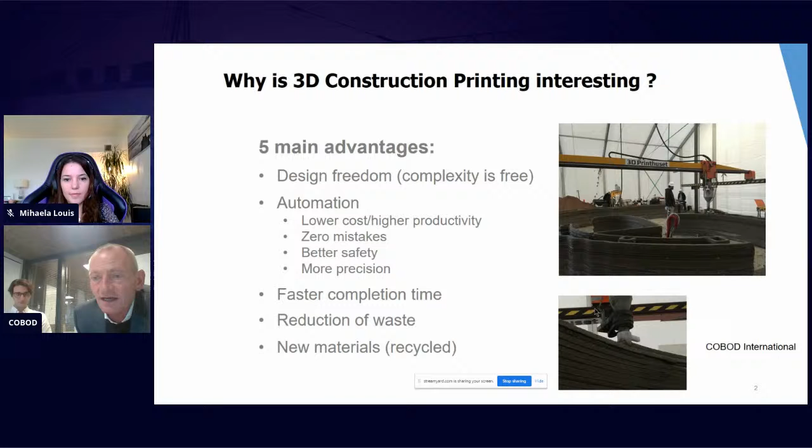Then, of course, from a CO2 point of view, it's also interesting that when you build this way, building the whole thing up from the ground, you don't use standard elements that you cut away to fit in size — you get an automatic reduction in waste. Finally, because this is a new technology, there's a possibility to apply new materials. Why not start using much more recycled materials as part of the building industry? Approximately 40% of all waste in the world is generated by construction and demolition activity. A lot of this waste could actually be recycled into new buildings, so we are definitely for doing that.

When you're not so clever, you have to ask other people. So here's what Deloitte, one of the big consulting companies, is saying about this technology. They're saying it's faster, 50 to 70% reduction in construction time. It's cheaper, 50 to 80% lower labor cost, less waste, and lower financing cost. And it's better because you can customize it, make intricate designs, design freedom, and so on.

Now, do we at COBOD believe this is the truth today? The answer is no, we don't. This is what we are hoping to achieve, but we are not there yet. We are showing that, yes, potentially we can get there, maybe especially for faster and better, and for cheaper. We are cheaper, but not as much as indicated here. That will take longer time to realize.

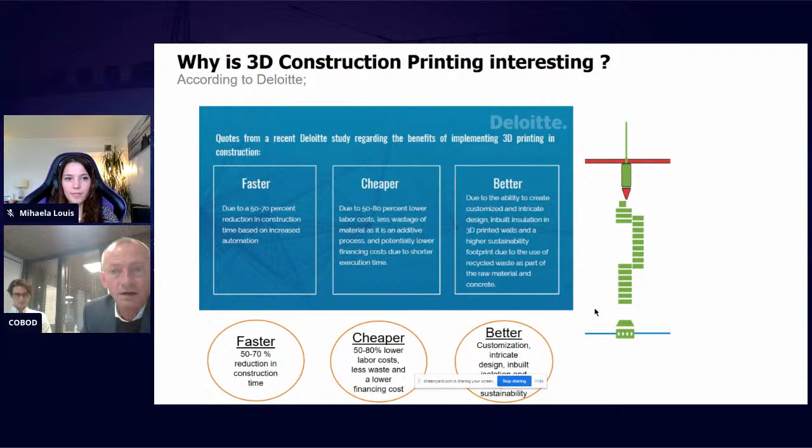It's important to understand that this is a technology that is really developing, and we need all the best resources thrown in to develop the technology and the processes around it as much as possible, which is one of the things that makes it very interesting for us to talk to you young architectural students, because you can help change the world.

This gap with Deloitte's potential has a lot to do with how it was when you first learned to ride a bike. The first time your parents tried to teach you, you'd probably be falling more than riding. That was the same for us. When we printed Europe's first 3D printed building, it took 2 months. The second time you rode a bike, you had a better idea, still insecure, falling less but riding more. Same thing here.

We made a copy print of that same building one more time, 2 years after, and improved the speed from 2 months to just 28 hours. By the fifth time riding a bike, you were mainly riding and not falling much, things going better. In our terms, that equates to being able to do the BOD building, a 50 square meter building, in around 8 to 10 hours.

By the 10th time, you were riding fast. Translated to our business, that would mean that in the future, we could see doing a BOD building of 50 square meters in just 4 or 5 hours.

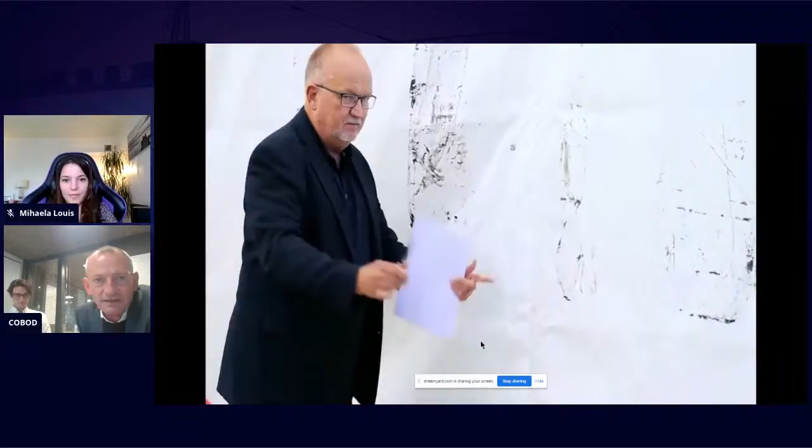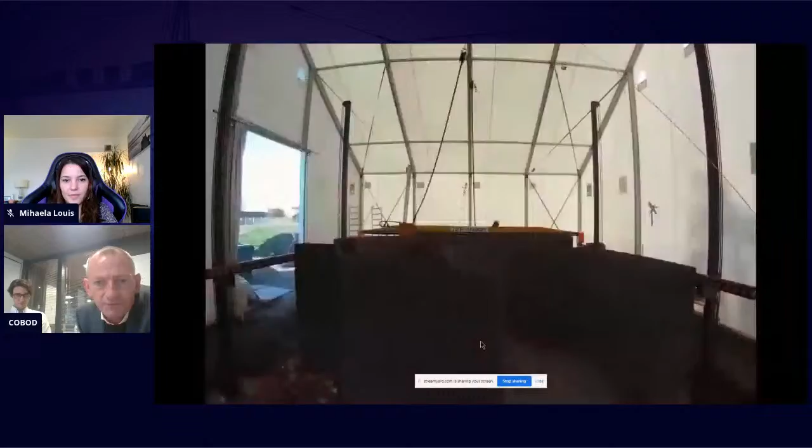If you look in a little more detail, we can show you the video of how the printing of the first building looked like, back in 2017. Typically for us, we did it in full publicity, with live television cameras rolling while we were printing. You see the building coming up here. At that point, we were called 3D Printhuset, and now we are called COBOD. Here you see the final building, still standing — it's a small office hotel.

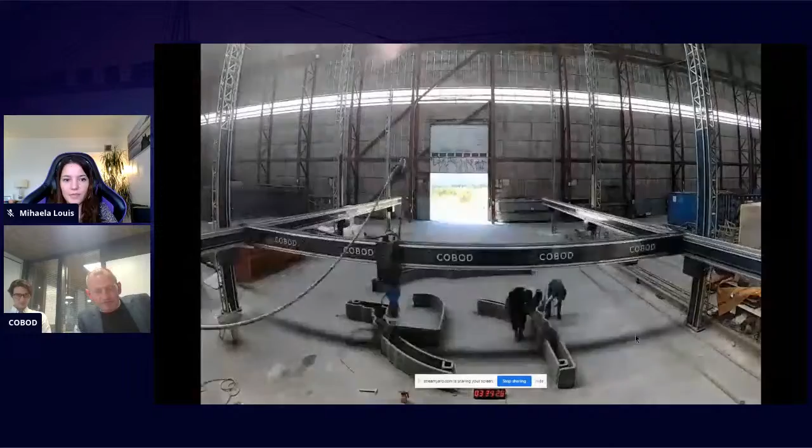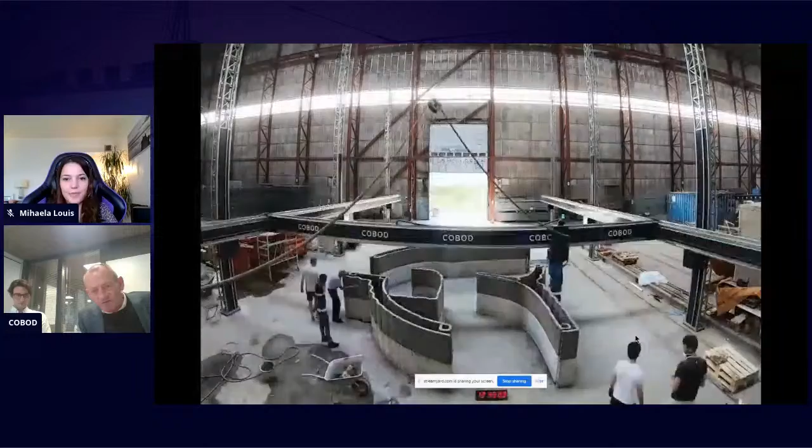When we took it upon ourselves to do it one more time, we decided let's prove how much we've improved, and let's do it again. Here you see the print the second time, and again typically for us, you see a timer at the bottom of the screen documenting our progress. The whole thing was done in just 3 days, 28 hours. We still made mistakes, similar to the second time you rode a bike, but we improved tremendously from the first time.

We also proved last year that we were very competitive. We won a building you can see here with a very interesting design. Unfortunately, I'm not at liberty to show you how the building looks — it's standing in Dubai, it's beautiful, but I can't reveal it because the customer, Emaar, which is basically the Sheikh's right arm in Dubai, responsible for the Burj Khalifa, the Burj Al Arab, the tallest building in the world, the 7-star hotel, the Dubai Mall, the marina — everything Emaar is behind — chose us as a supplier to print the first villa. It's beautifully looking, but I can't show it. Hopefully we can show it to you within a couple of months.

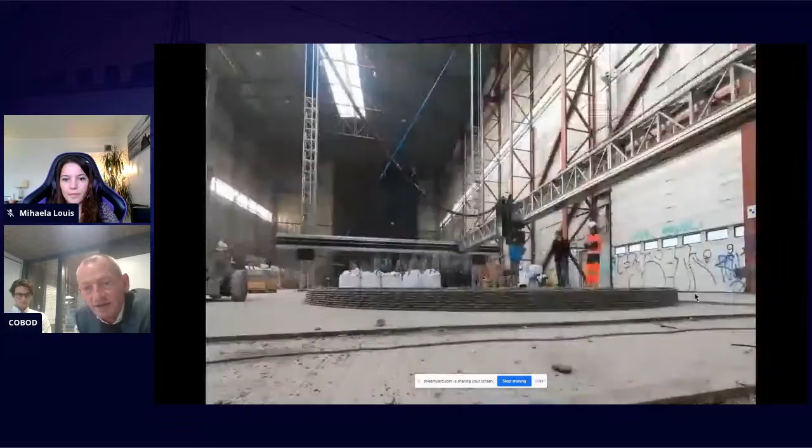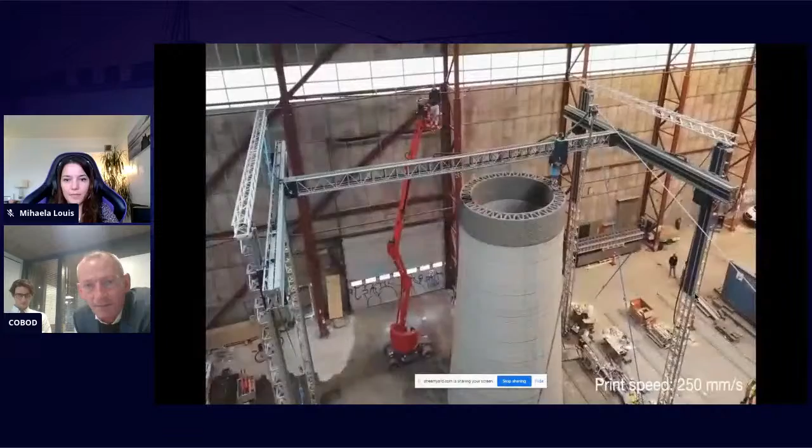We also proved that not only buildings are interesting for this technology, it can also be used for other purposes. Here you see the first ever 3D printed concrete windmill tower, which we did for GE America, in cooperation with Lafarge, who delivered the material. Notice when we get to the top here, there's no people — well, there's a guy standing, texting his wife while watching the printer — but that's it. The whole thing runs automatically, and it was a 10-meter tall print, the tallest print in the world so far.

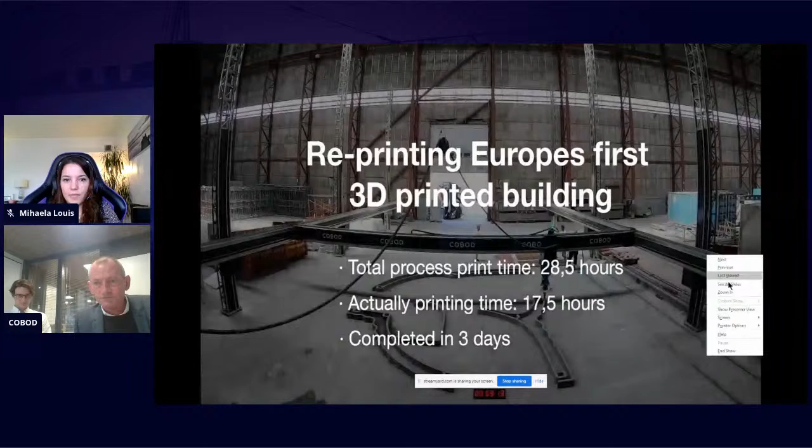Oh, I was supposed to go on. How do I do that? Can you just make sure it goes on?

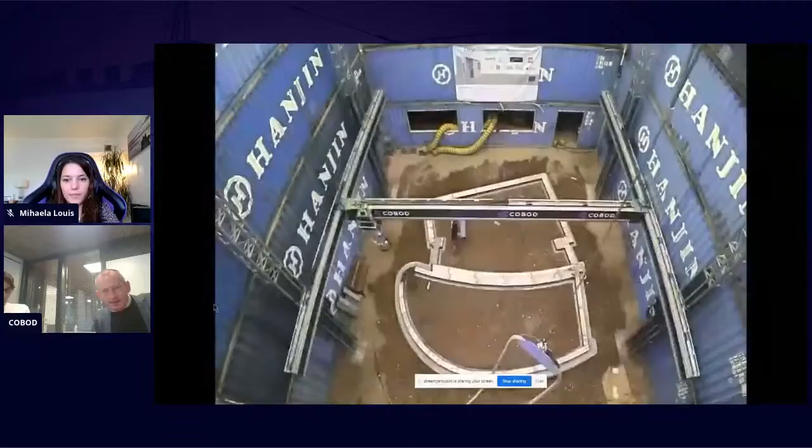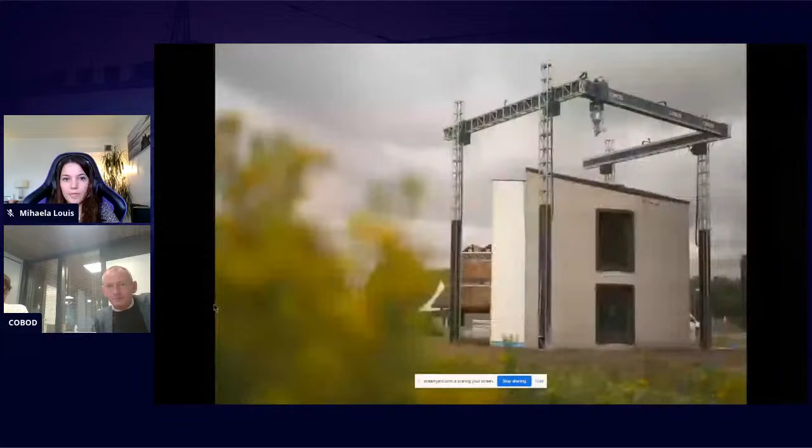So in November last year, but it was first revealed this year again because of COVID. They planned to reveal it in March, but then COVID came. Our Belgium customer revealed the first two-story building in Belgium, made with our technology. This is the first 3D printed two-story building ever made in Europe. The interesting thing was that it was actually printed by students. The customer itself doesn't have any employees. They are educating other people, so we educated students who could print the building. That shows you the technology is not more complex than that.

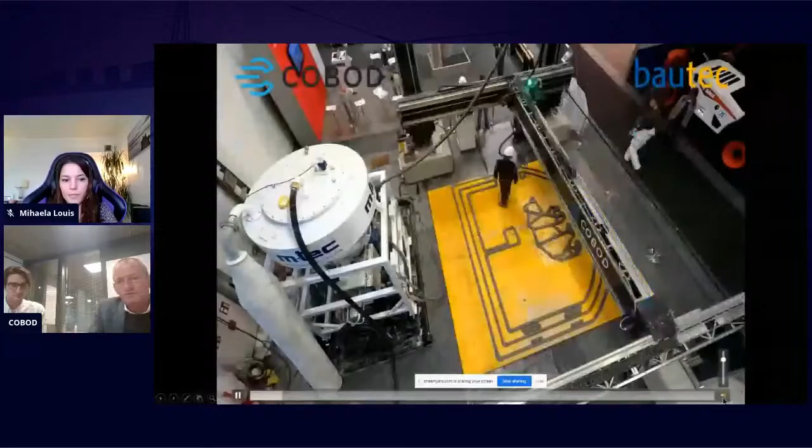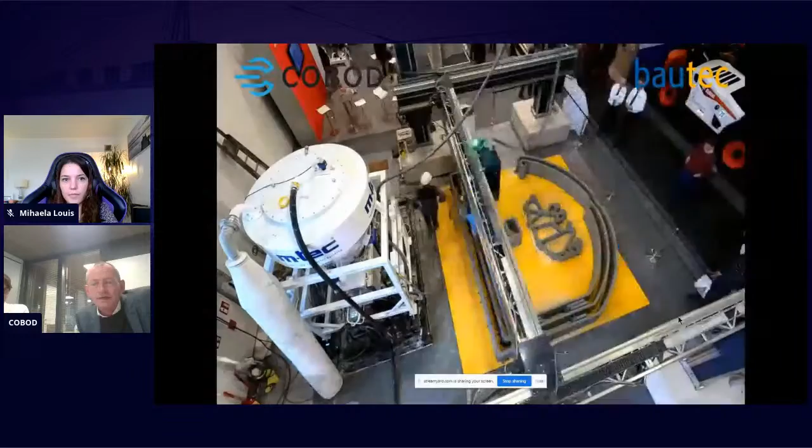Then in February this year, we decided to show the world that this is really a reliable technology, which is why we took it upon ourselves to demonstrate, each day for 4 days at an exhibition, that we could print a small building every day. So every day from 9 to 5 we had the printer there and were printing a small building live in front of people.

You can see there was a lot of people. We were really the talk of the town. If you wonder what that funny thing that looks like an ice bear in the middle of the house is, that was actually the conference organizers who came to us and got totally impressed by the way we could give shape to concrete. So they asked us to print their logo, and we did that.

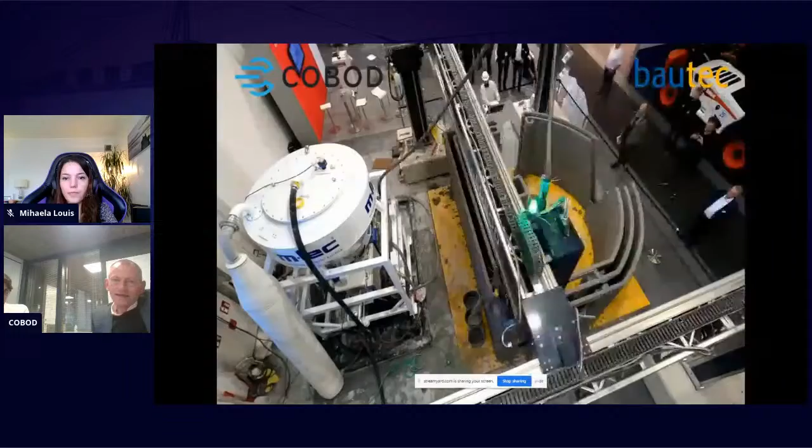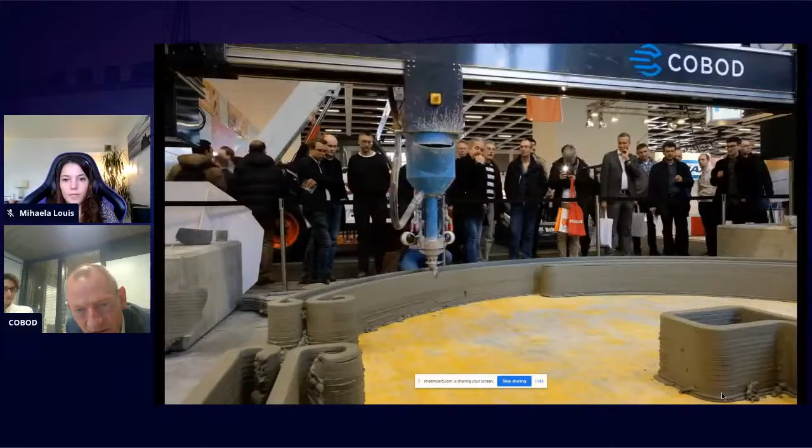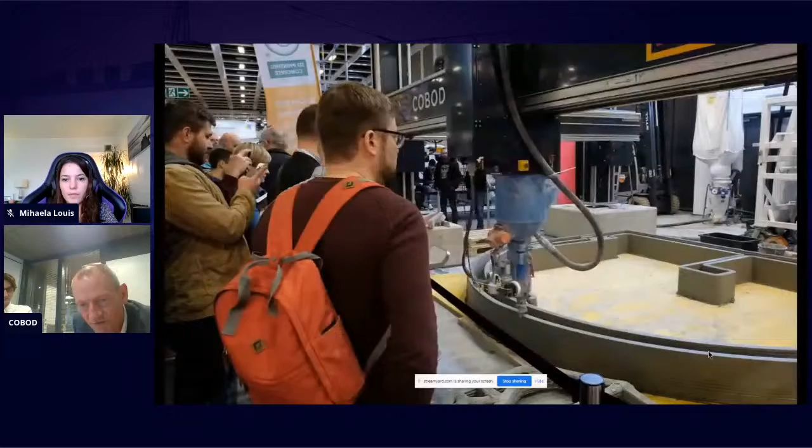Now, this video will show you a bit more about the details of how the printer works. Notice the end of the print head, there are some metal flaps. You can see the effect of these flaps because they were not used on the first layers but are used on the top layers. That actually removes the Michelin sausage or tire look that you get with a round-headed printer. We have square nozzles and print with these flaps, and you see how the walls become very smooth and neat to look at, lowering the amount of plastering work needed.

There was a lot of video shot that day by the spectators.

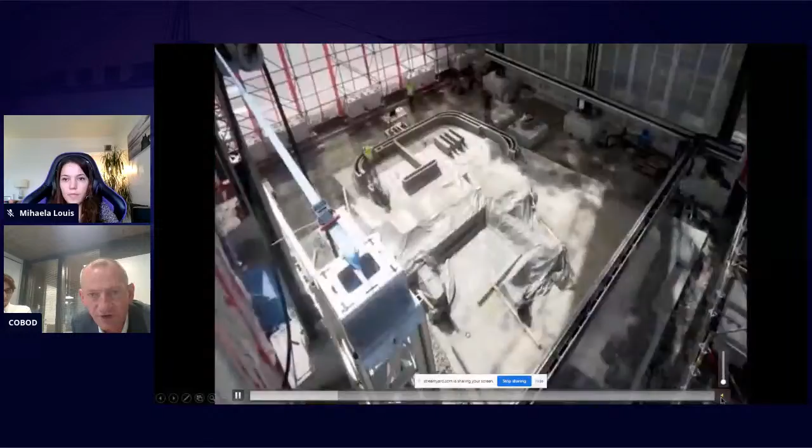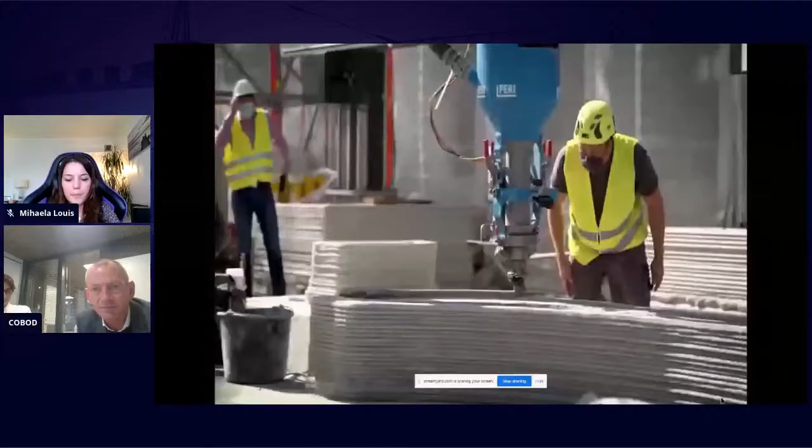Then in September, our German company PERI revealed that they would also be building a two-story building in Germany, and you see the building coming up here. They chose not to use the flaps, wanting this 3D printed look because the customer felt that would be selling well, whereas we normally tend to print with the flaps to make it a smoother wall to look at. I'll show you a picture of how that building will look when finished later.

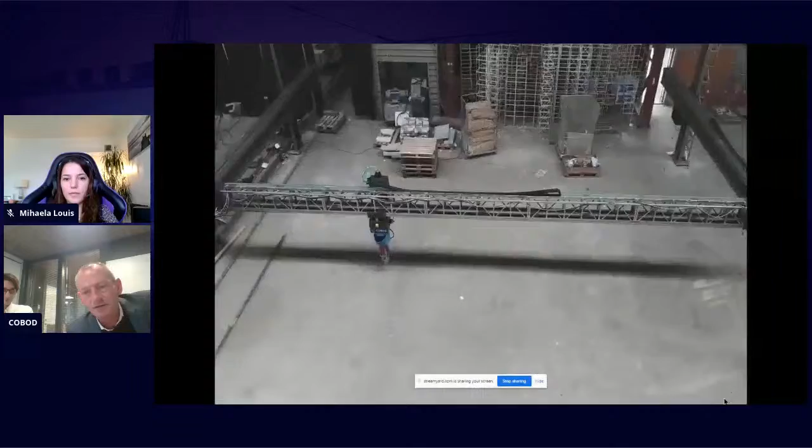So far I've shown you quite small buildings. To give you an idea about the size possible, here's a video of the largest construction printer ever sold in the world. If you notice the small van in the left-hand corner, it gives you an idea of scale. This printer is 27 meters long, 12 meters across, and 10 meters tall. That means you can print buildings of 300 square meters on 3 levels, almost 1,000 square meters in total. This video also shows the robustness, quality, and stability of the printer.

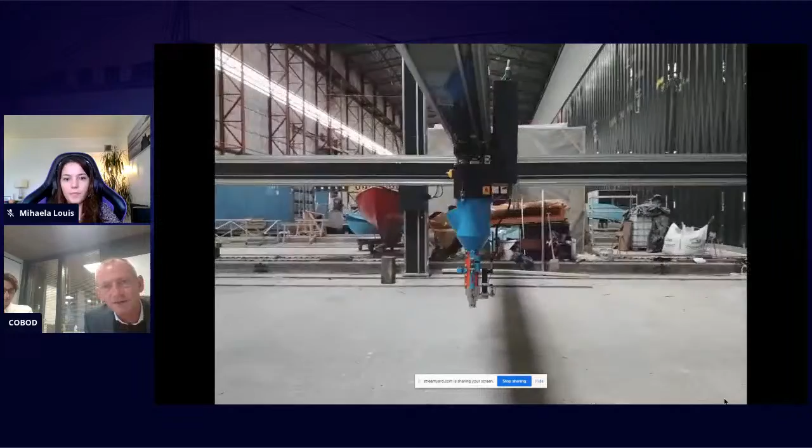This is really heavy-duty construction equipment that we are selling. This is not a flimsy hobby printer like our competitors are selling, and that's the reason why we're also the best-selling company within this industry.

So today our technology is being used on all major continents. That means we have printers in Asia, the Middle East, in Africa - even in Africa, yes. Africa has actually been one of the two top markets for us this year, along with Europe and the US.

In terms of customers, I think it's noticeable that large corporations are choosing us. General Electric, I think needs no further introduction. EMA from Dubai, PERI from Germany, and also various universities worldwide are choosing us. But next to that, we also have quite a few real estate developers who, together with architects, want to shortcut the construction chain and do part of what the general contractor normally does.

And finally, we're also selling into, in essence, our competitors, which is the precast plants, because the precast plants cannot give their concrete special shapes, but we have definitely the capability to do it.

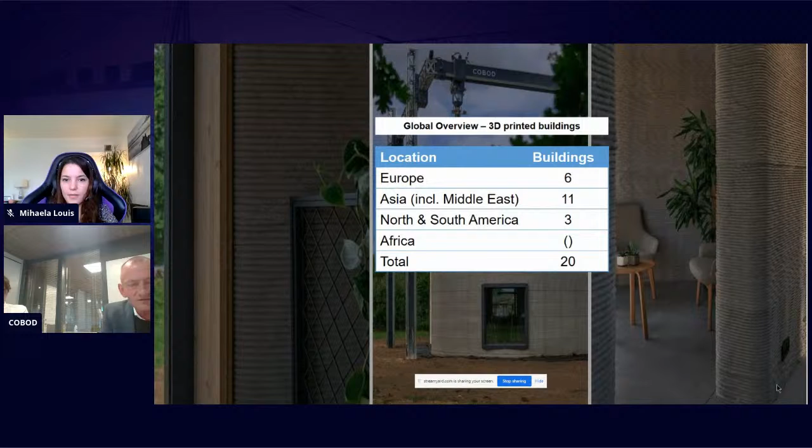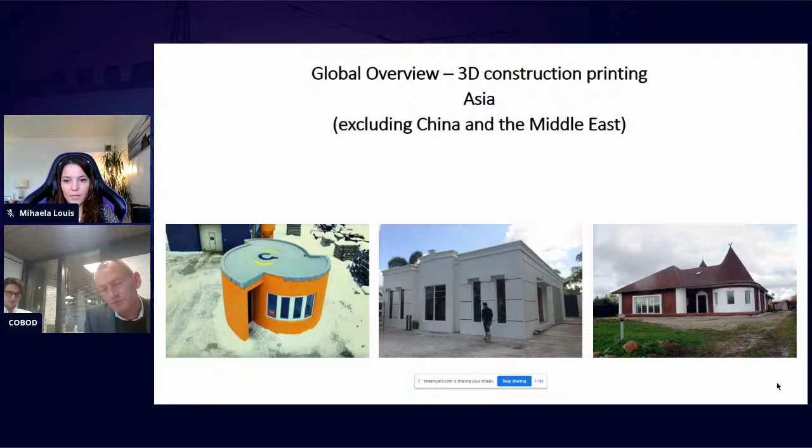We actually did research over 3 years, and the next building, which is in the Philippines, was actually the nicest one that we saw that had been 3D printed. That was 3D printed by a gantry printer, the same type of printer that we have in the Philippines, and you see, it's actually a quite nice building. So the one on the right-hand side is a Russian building. It's been made as precast components, so 100 different components.

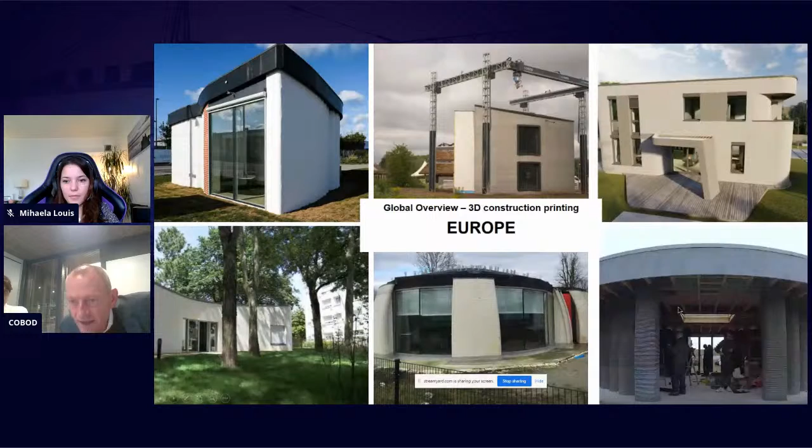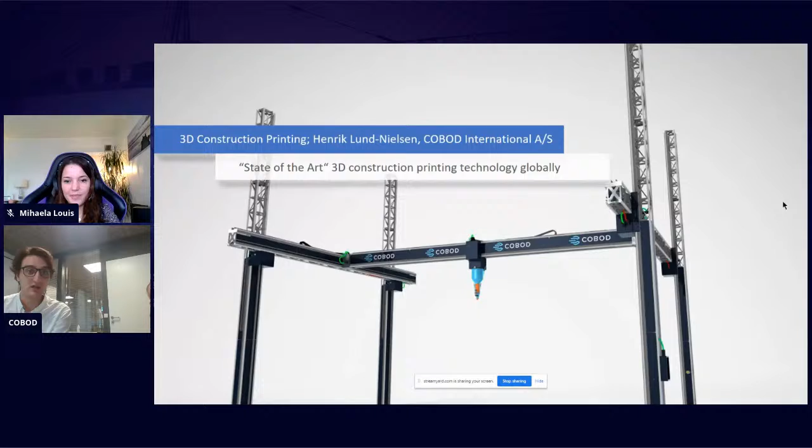And by this, I will hand over to Said for more information about design. Yeah, sure. Hello, everyone. As Henrik introduced me, I'm an architect and a sustainable designer over here at COBOD. I'm gonna take you through a detailed, or a quick review of how we actually 3D print and design 3D printed buildings.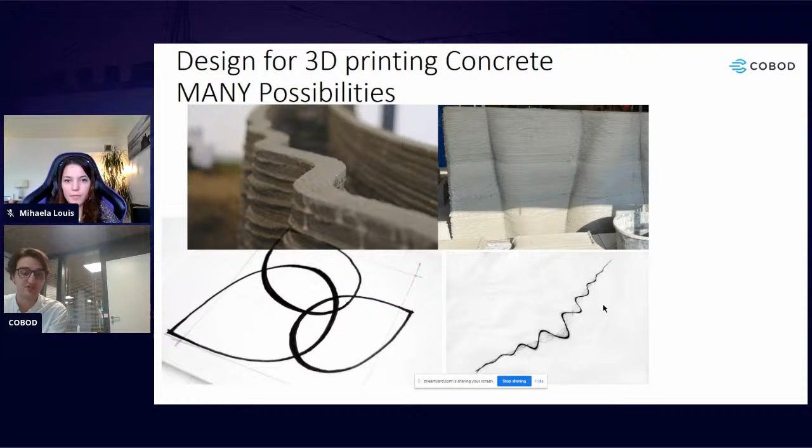So basically, as Henrik just mentioned, the designs of 3D printing have many possibilities. Most likely it's the freedom of design and realizing architectural free forms and so on. As architects, we always have this discussion of form follows function or function follows form. We also have this challenge of how we can shape the sculptures that we design. With this technology, we have the advantage of having freedom of design without the consequences of weakening the structure or going around extra cost and so on. So this is something that architects believe is like a dream coming true.

To a certain point, yes. So this is something that you have to consider while you're designing. Again, the architect will be the leader in going through the building process. And of course, when you're designing, you have everything in the back of your head.

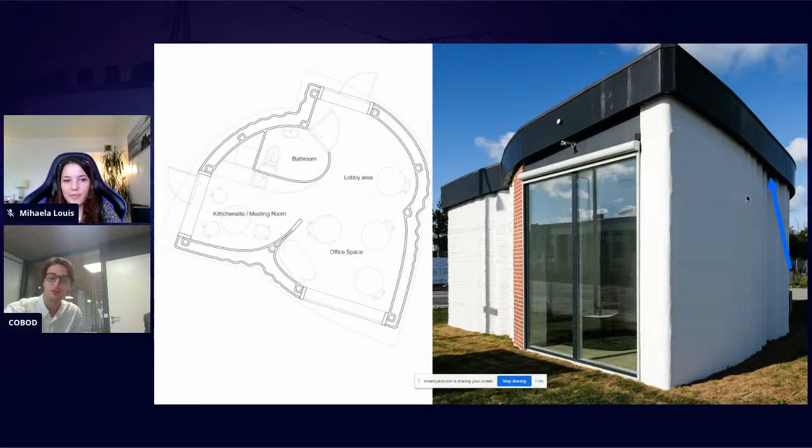So I'm trying to show you what you should have in the back of your head when you are designing. I'm going to go through general 3D construction printing design guidelines and some case studies we worked on. The agenda: I'll talk about freedom of design, guidelines for 3D printing, stability, overhangs, corners, and design basics. Then we'll have a session to evaluate complex concepts, and then we'll go to assembly.

Again, this is one of the details we talked about. This is the BOD building, as we mentioned. As you can see, because 3D printing doesn't provide a whole solution, it provides a part of the building. Over here you can see the roof, made out of wood and steel, and that was one of the major points that increased the cost of the 3D printed building.

I'm going to talk about stability. So basically, this is what happens: 3D printed concrete is extremely low in strength and stiffness because it's really fresh when you're printing it. Of course, 3D printed material should be pumpable and buildable, and it should have some kind of layer time. So you have to consider what kind of geometry or shape you want to print and how stable it is. I'm not talking about stability as a final product, but stability while printing, because while printing, concrete is going to be wet and it's not going to be stable.

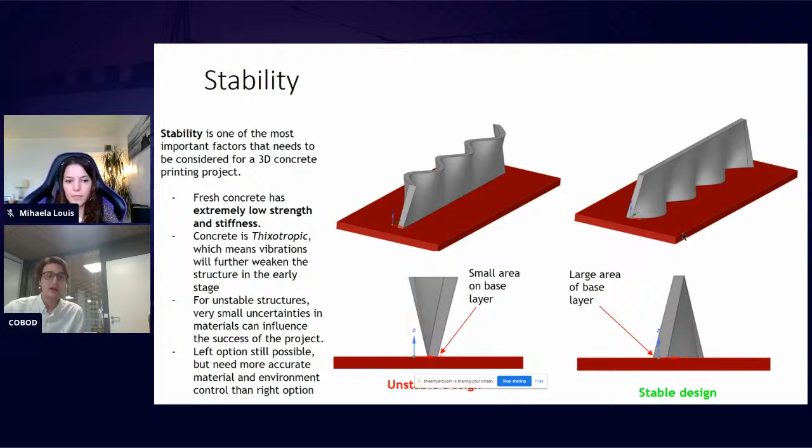At the right hand side, you can see a stable design because it has a larger base area, and the layer on the left hand side is going to be unstable. Most likely the design on the left can be doable, but it has more tendency to fail, while the design on the right hand side will be more stable and easier to print.

The same case goes with overhangs. Architects love to go crazy with designs, and because we provide this freedom of design, we also have to consider the center of gravity and how the walls would look, along with the overhangs. We generally recommend overhangs of 10 to 20 degrees; lately we've gone up to 30 degrees. It actually depends on the material, the setting time, the printing parameters like layer width and layer height, and the geometry or shape of the 3D printed object itself.

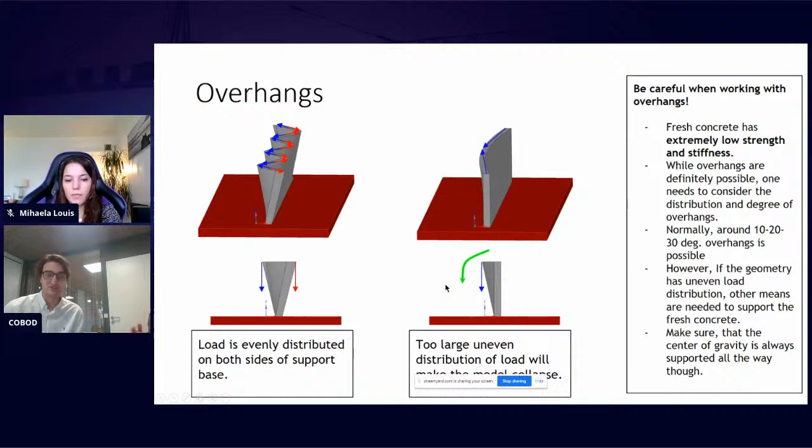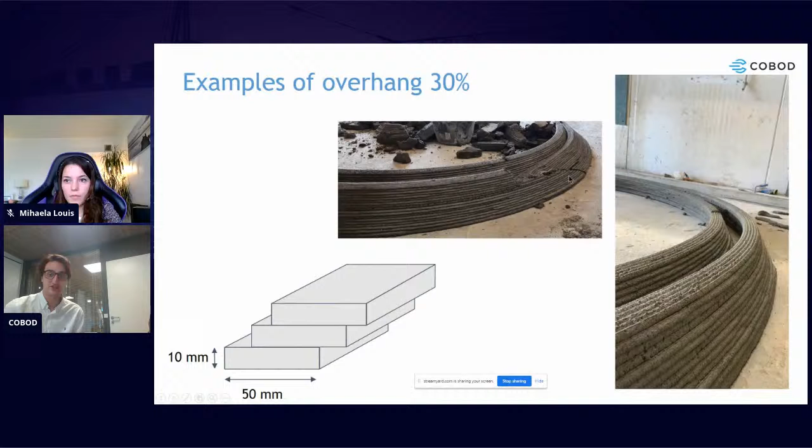This is an example of overhangs. We had this print, and you can see how much the printing parameters control and provide stability for the overhangs. This was a 50 mm layer width and 10 mm layer height, and as you can see, it failed at the 30% overhang.

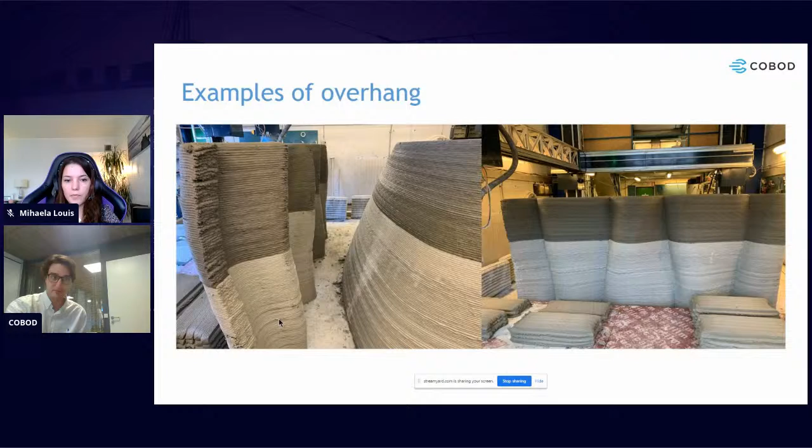We printed the same object but with a much wider layer width, around 100 mm with a height of 10 mm. Engineering-wise or physically-wise, this area will have a better connection, and the force connecting both layers will overcome the force of the overhang trying to drop it. So basically you have a better tendency to have a stable object. We also went slightly crazy with the design, and it was pretty stable using those printing parameters.

We're also going to talk about corners. This relates to the design and also the printing method, because we most likely use square nozzles, and square nozzles also have flaps. If you have a really sharp corner, the nozzle will start etching or removing bits of concrete from the corner, damaging it, while with a radius that's more compliant with the width of the nozzle, you avoid that damage.

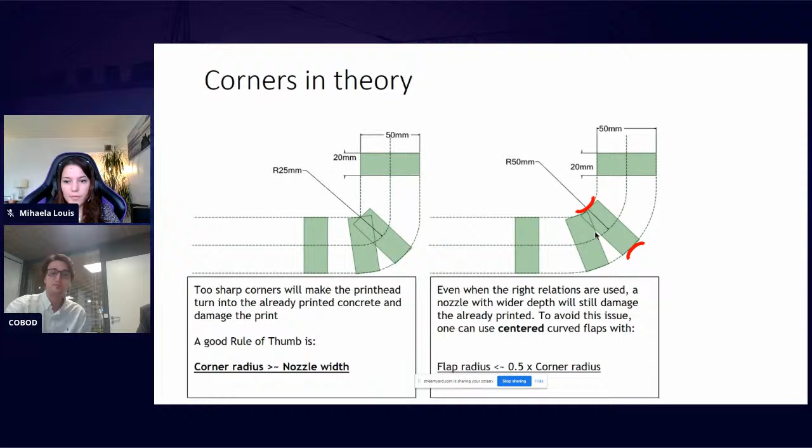As a rule of thumb, the flap radius should be smaller than half of the corner radius, so you will have a smoother corner. This only applies when you are using a square nozzle with flaps. If you're using a normal round nozzle, it wouldn't actually matter.

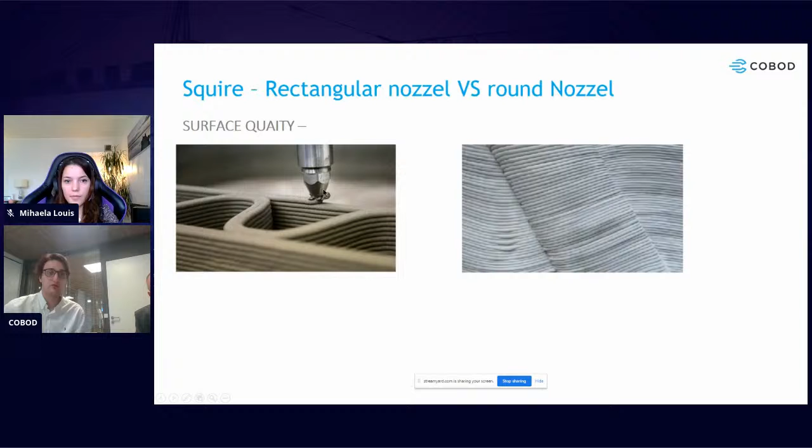You can see it over here, this is a round nozzle. You don't have to rotate this nozzle to match the direction of the print. It's a different case when you use a square nozzle with flaps, because you have to direct the nozzle to the direction of the print to make sure the flaps are not cutting through what you have printed. So it's easier to print with a round nozzle.

It also requires special software and hardware solutions to print with square nozzles to get the smooth, flat walls that we are getting, which is why most of the prints you're seeing look like sausages stacked on top of each other, simply because other suppliers of this technology don't have the solution that we have. It's easier, but you will always end up with that look if you print with a round nozzle.

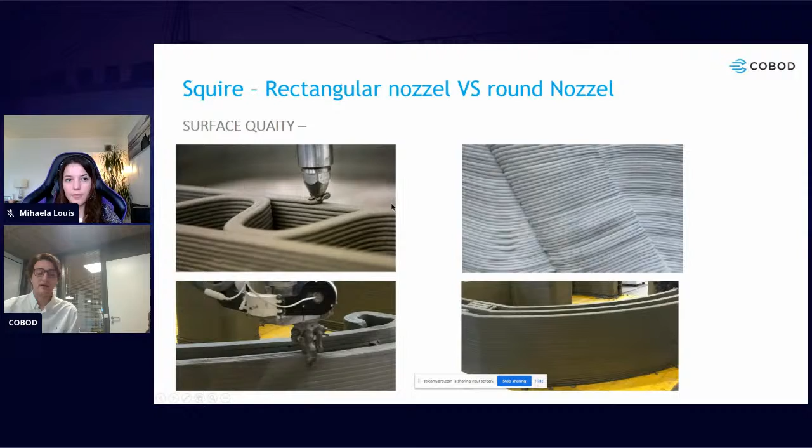We don't care, we can do both. The round nozzle, you can see the fair face over here, we can actually control the nozzle itself. As you've seen in these examples, we had different nozzles and different thicknesses, so we can have a nozzle with 100mm, 50mm, 30mm, even up to 500mm, which is almost half a meter, and so on.

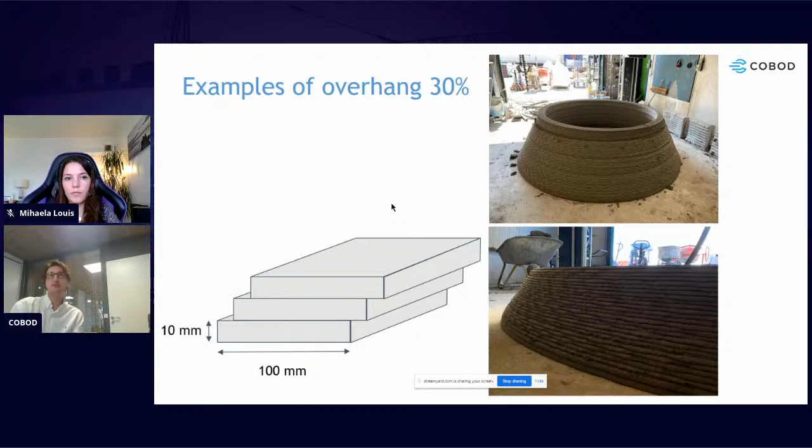So these things are controllable, and in that sense, this ability of the technology will help you achieve the design that you're going for. I'll go later and talk about other features that we can do.

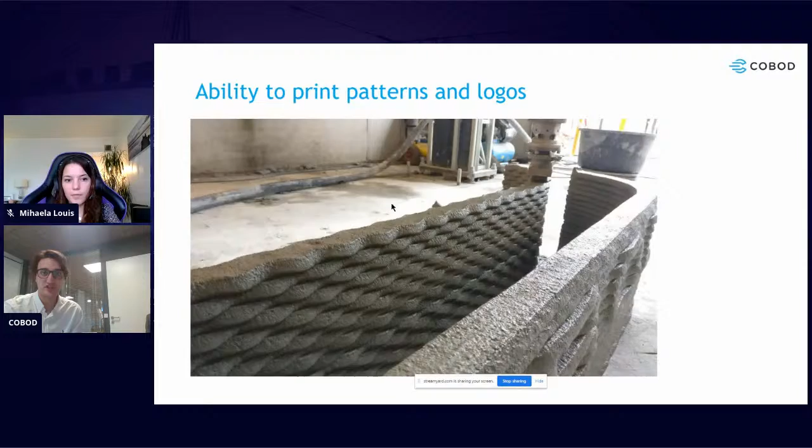We also have included in our software the ability to add and print patterns and logos. As you can see over here, we had a map, and our slicer will understand where to move to achieve this kind of pattern or logo.

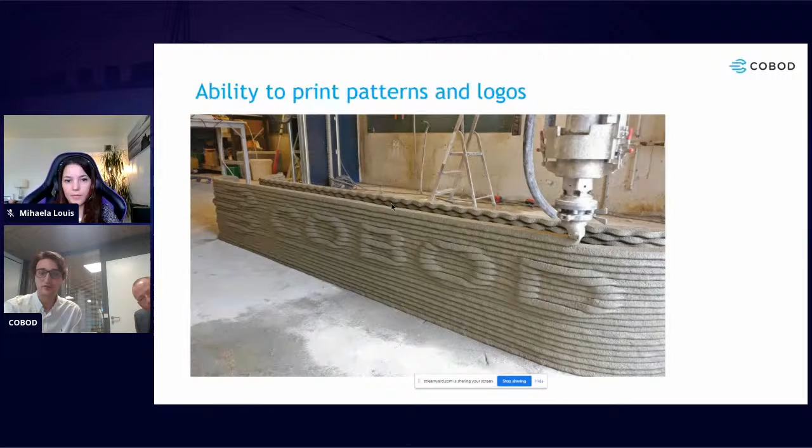Over here you're going to see a video presenting how we can move and create the pattern. This pattern is generated by a PNG map. You can load it into the slicer and control how much you want to offset through the wall and so on. Here we're not using flaps, because the moment you use flaps, you eliminate any protrusion or recess that happens while 3D printing.

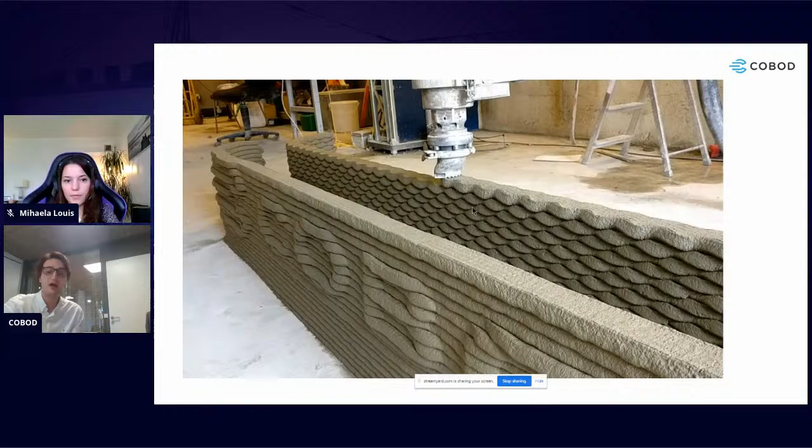As we talked previously, you can actually change the nozzle width. You have a variety, and you can 3D print this nozzle and use whatever sizes your design requires. The format can be a STEP file or IGS.

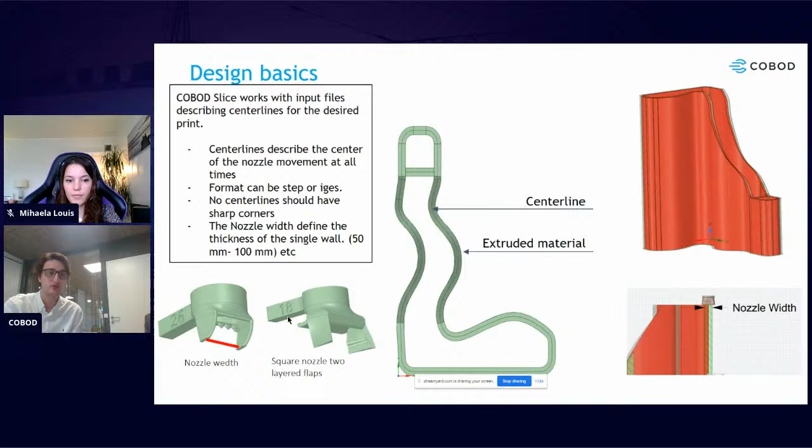The center line should also avoid sharp corners if you are using a square or rectangular nozzle. For example, this is how it comes from a CAD file, and then we go through the slicer, and this is how the drawing of the layers would look like. So if you load a file, this is how the outcome would look like.

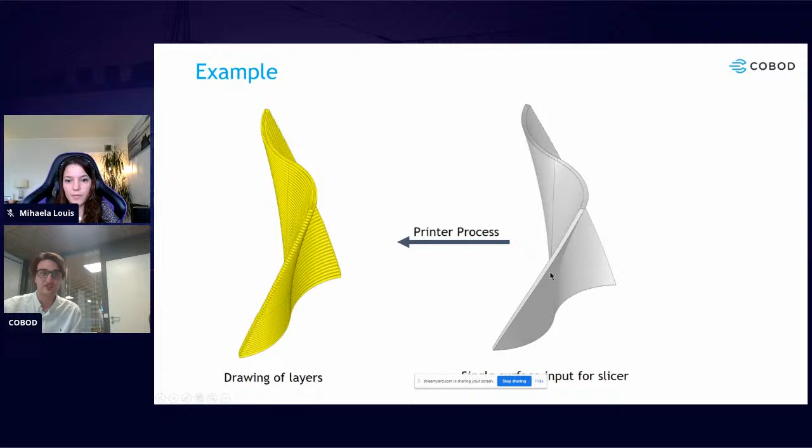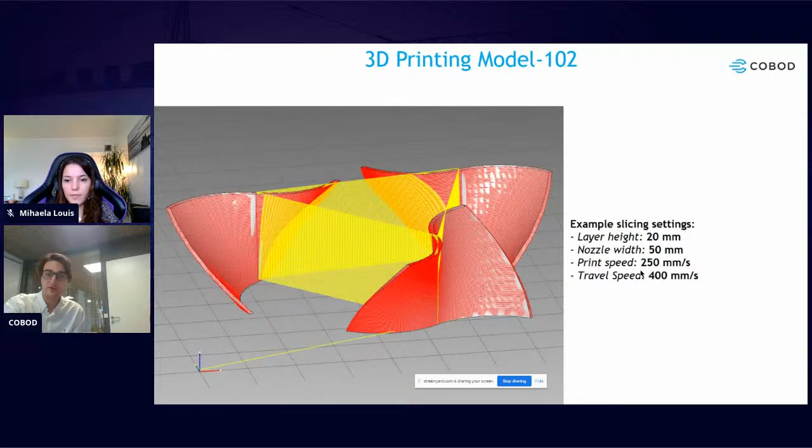We'll look at a small example or study case, this is model 102. Over here we can see the slicing settings: the layer height was 20mm, the nozzle width was 50mm. The print speed also defines the material and your layer time and so on, and the travel speed is the actual speed when you move from one object to another.

When you design something like that, you also have to consider what kind of internal support or structure you need to provide, so your geometry will be physically stable, depending on the local codes or the design you have. On the left-hand side, you can see the zigzag or snake print, which is like the infill in normal 3D printing. On the right-hand side, you can see these voids that will later be used as columns to support the wall.

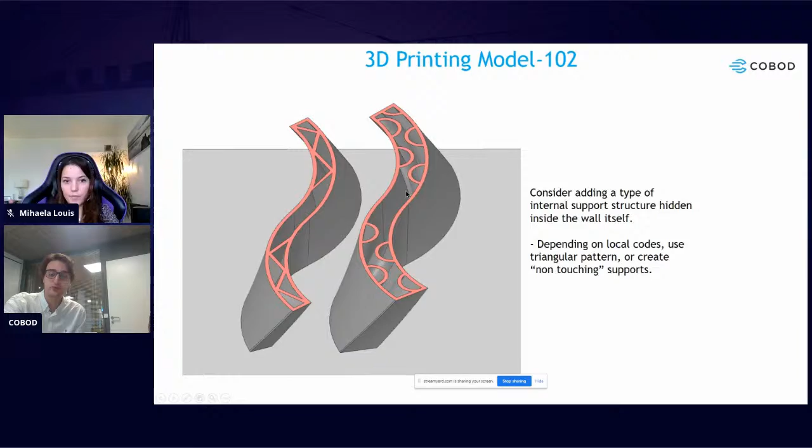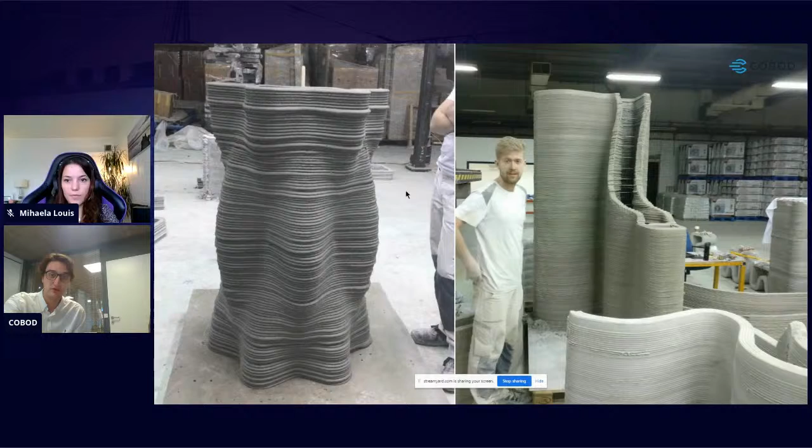This is an example of how that model was later 3D printed. This is another example showing how you can actually 3D print complex shapes and so on.

There's another example over here, a kiosk with a unique kind of design. We also have to have comments about the radius or the limits of the sharp edges. We talked about this V shape, and we have to avoid all of these sharp edges. All the drawings should be represented as a center line for the printed wall and so on.

Again, because you have the freedom of design and the printer is already there and can do everything, also consider printing outside benches, other furniture, frames for windows, and so on. That will be useful because you already have the tool in function at the moment.

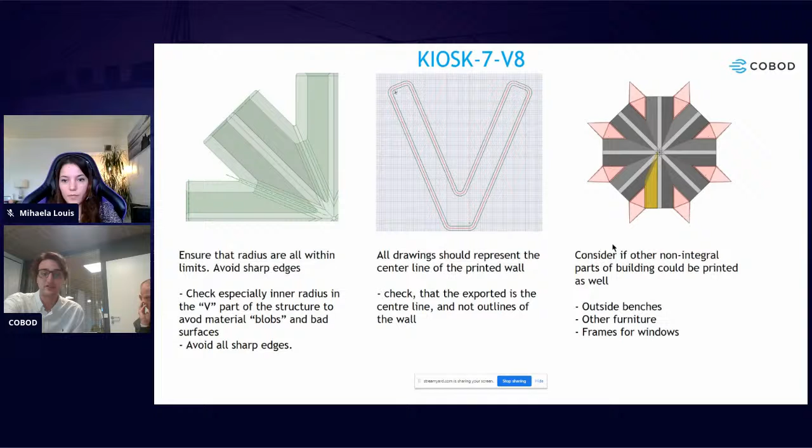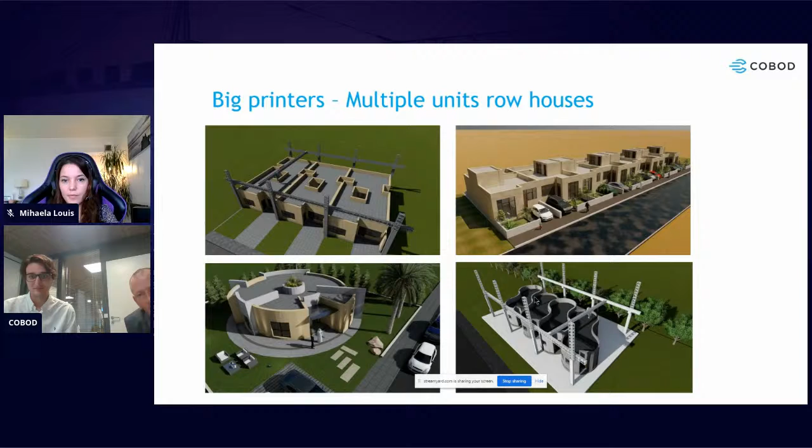Over here we can also see the construction details, exactly how the 3D printed building would look. This is more detail of how the double wall would work. We've been considering other things we have to accommodate in our 3D printed design, for example insulation, acoustic properties, the structural system, and so on, to make it as livable as possible and compete with conventional methods. So what I'm trying to deliver here is that 3D printing doesn't mean you have to compromise what happens in normal buildings. You can do it the same way, and even better and faster.

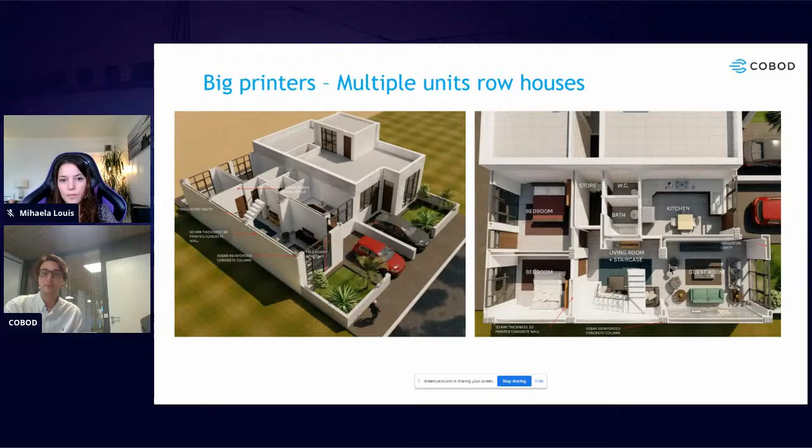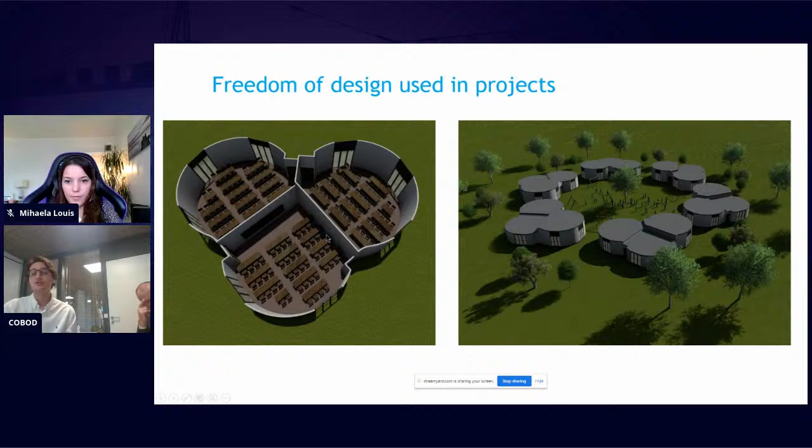This is the same project we talked about, another example of freedom of design, which is also a project we worked on. Over here you can see we utilized the freedom of design to have this kind of flower-shaped classrooms. We also went beyond the local architecture of the building itself, utilizing how we can arrange it in an urban design, to make a school with a protective space in the middle without using ugly fence walls. It also gives advantages of amphitheater acoustics, creating a new environmental sense for the educational system.

So let's have a summary. Complex design is possible, but not too complex. Freedom of design is free for 3D printed segments of the building, but not for the non-3D printed attached segments, like we talked about regarding the roof. The size of the printer influences the size of the building, the layer height, the layer width, and so on. These printing parameters are essential for achieving the required design.

So we talked about the layer width, layer height, nozzle shape and size, using flaps or no flaps, and printing speed. Material is a cornerstone in 3D printing, so consider the layer time and buildability. Also consider structural stability and strength in your design. When designing, keep in the back of your head how the building will be structurally stable and what kind of strength it can have.